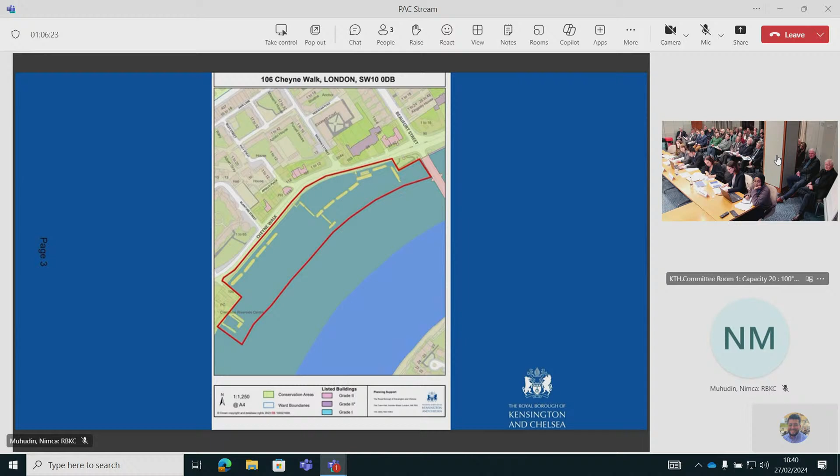So this is the site, known as Chelsea Reach or sometimes Battersea Reach. It's located on the northern bank of the River Thames, adjacent to the embankment. It's bounded by Battersea Bridge to the north and 106 Cheyne Walk to the southwest. It's historically been used for the mooring of houseboats for over 70 years. The houseboats are moored in 2 groupings separated by a central gap, and it's noted that they vary in size, design and condition.

That's a plan of the moorings. The site is located within the Thames Conservation Area. It's designated as a site of nature conservation importance within the River Thames and tidal tributaries. It's within the Thames Special Policy Area and the Chelsea Riverside Archaeological Priority Area.

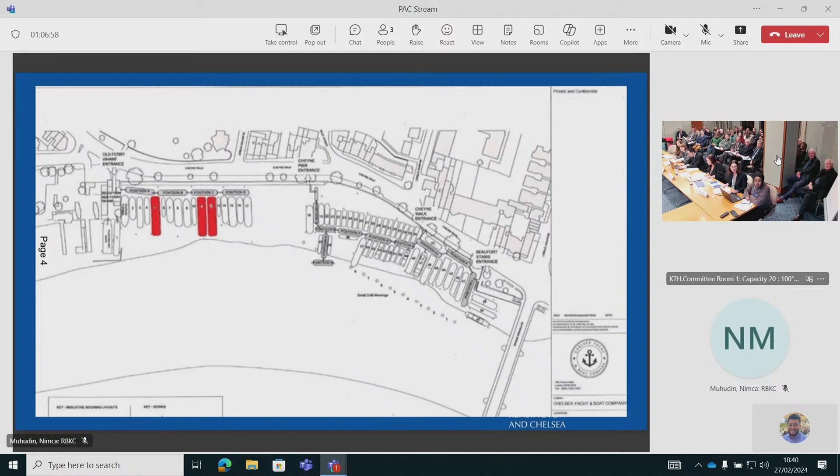So the legal and policy framework that you're making this decision in tonight is discretionary. Enforcement action may only be taken if there is a breach of planning control that's considered to be harmful. Enforcement action should only be taken proportionally to the degree of harm.

But you have the report before you, which considers the matters in detail. The main issues taken into account when considering whether it's in the public interest to take enforcement action are the effect of the material change of use by intensification on the Thames Conservation Area, considering its status, the river as a navigable route and its biodiversity, road traffic and on-street parking stress, the living conditions of nearby residents, control of waste and housing provision.

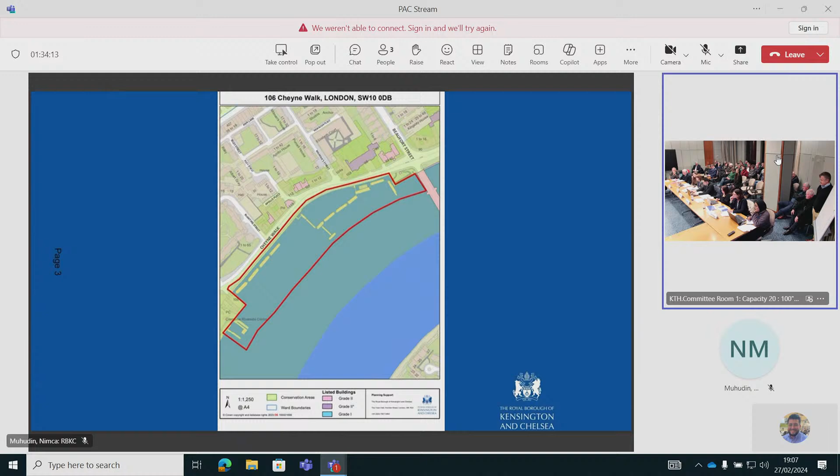Any other questions? Tim? For the objectives, yes. Could I ask if you know what the volume of the boats was that were moored there previously?

At paragraph 14, what I've calculated is, just give me a moment, yes, paragraph 14 actually. Houseboat Stow, for example, is an 86 foot boat, about 26 meters, and it has a width which gives rise to a square footage of 213 square meters, that's 2,300 square feet.

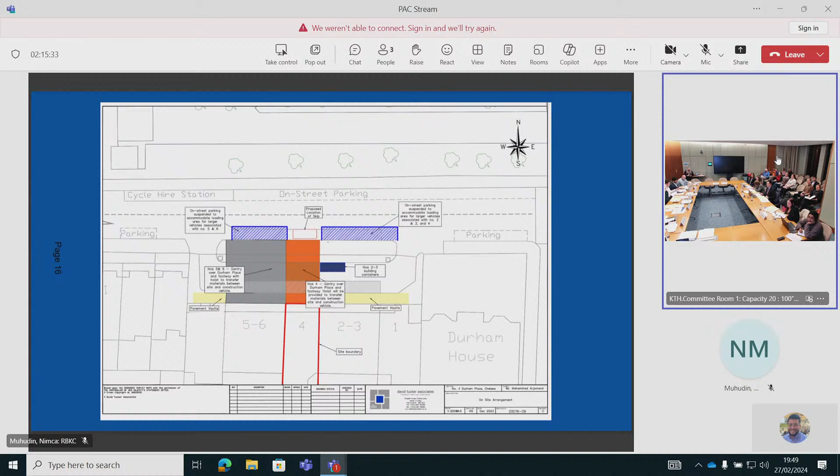What that meant is that number 4 proceeded to do its various works without having submitted details of its conditions, including the condition for the CTMP. Essentially it's been operating for about 2 years with a CTMP in place, but that CTMP has not been approved, and it's with you this evening. Now, the reason it's taken so long is there has been some changes made to that document, as well as consultation with neighbours, to ensure that obviously the document is fit for purpose. Now, the sites have been operated, so 2 and 3 is under construction, so is 4 and so is 5 and 6. So you can imagine that if not properly managed, it could be somewhat chaotic. But the plan before you just shows the current arrangements. Now, essentially they've each got their own separate plan, but they do work with each other, and you can see that they're sharing spaces with regards to parking suspensions to accommodate loading for larger loads. The recommendation is that the CTMP is sufficient, it meets the requirements of the condition, and the committee should be minded to grant that this evening.

That's it. Thank you. Are there any questions about this?

Just so the CTMP, the new proposal, has been. Yeah, so this CTMP by and large has been in operation for nearly 2 years. We made some amendments because as they're approaching the latter stages of the construction, they were considering keeping 3 skip placements on the highway. Obviously, as construction goes on, you don't need that amount of skips, it should reduce as you go through the programme. So one of the changes we've got was, you can see the red box just in front of the orange box is the proposed location for the skip. So we reduced from 3 to 1. So it's those sorts of changes that are just taking into account the way in which construction takes place over time.

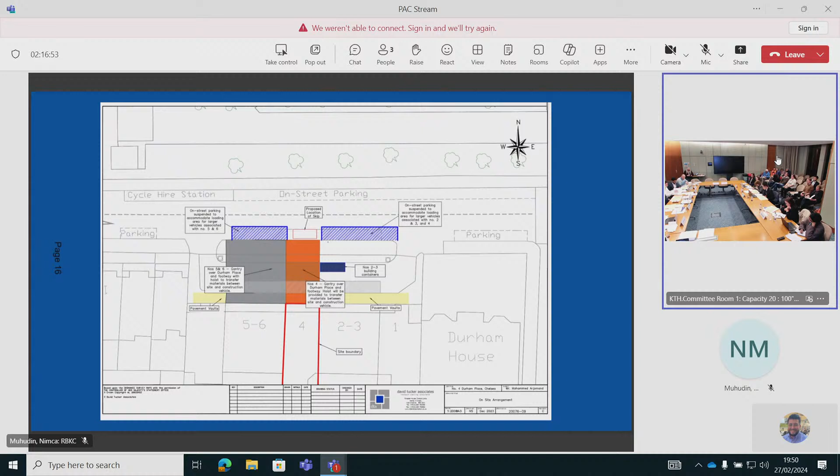In that case, I think we can make a decision. The recommendation is that we grant approval of discharge of condition. Can I see those in favour, please? So that is agreed, thank you.

If we can now move to the north, we have 2 applications relating to 1 Carmel Court. Now, although it's the same property, they actually relate to different developments. I think we're going to take them in the order in which they appear in the pack. Alice, you're going to introduce this. So we will first consider application 23/07598. Would you like to introduce that when you're ready?

Great, thank you Chairman. So the application before members this evening relates to number 1 Carmel Court, identified by the red arrow on the slide. As mentioned by Councillor Husband, there are 2 applications before members this evening. The first relates to some alterations at roof level and to the rear. This is the first application which I'm going to present and which is going to be considered.

So the existing front and the proposed front elevation can be seen on this slide. The red arrow denotes the application, and the red marking on the left-hand image includes the demolition of those front railings and the existing access hatch to the roof.

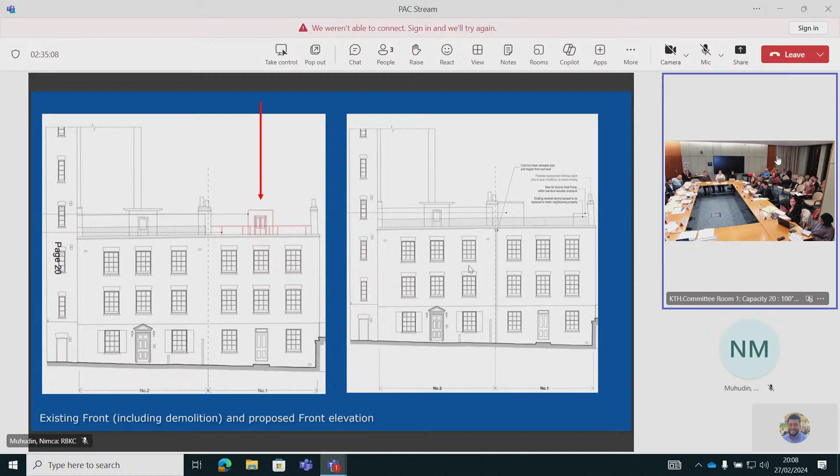I think it would be helpful, considering it's a conservation area, if the railings could match existing. It is - sorry, I'm saying it's matching existing. Okay, perfect - zoom in on that was what I wanted.

Yeah, okay, thank you. By the way, just for clarification, I think this point raised about being a roof terrace - we're not asking for a roof terrace. It needs a sensitive enclosure to be able to access it and everything else, but there isn't an actual - we're not saying you could use the roof as a terrace. Be absolutely clear, thank you.

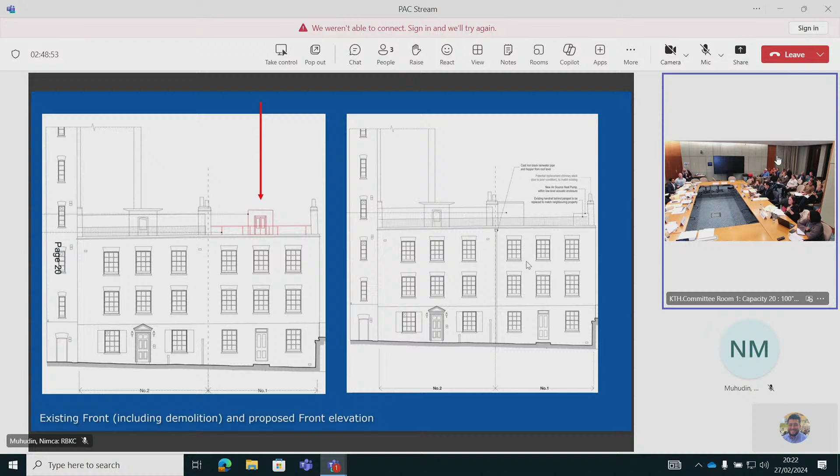Is there a railing all the way around? Not currently - so the application seeks to extend that railing to the rear. Would that encourage use as a roof terrace?

You wouldn't necessarily now go and sit with your legs dangling off and have a pint, whereas if you put up a railing, you could have a little stool and go and sit there. So I guess, given that the applicant has said they're not intending to, hopefully they won't, it shouldn't be a harm to them. I would feel more comfortable with that condition.

Just be my point. So if members wish to include a condition, if we can. All right, I think we need to make a decision.

You could either add a new condition to preclude the use of the roof as a terrace, and should that condition, number 7, no longer be needed, then you could remove it. I think having a new condition precluding use of the roof as a terrace, if we can do that, I get the distinct impression that would be supported by colleagues. If I may, just to avoid confusion, I would suggest that we amend condition 6 to remove reference to terrace or roof railings.

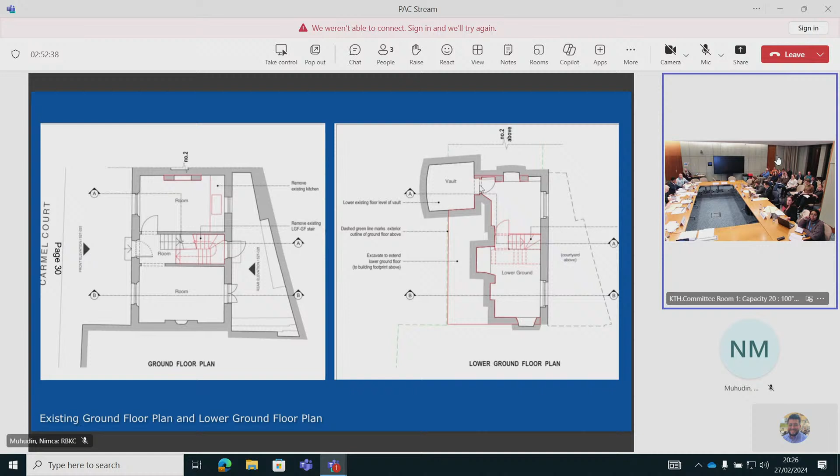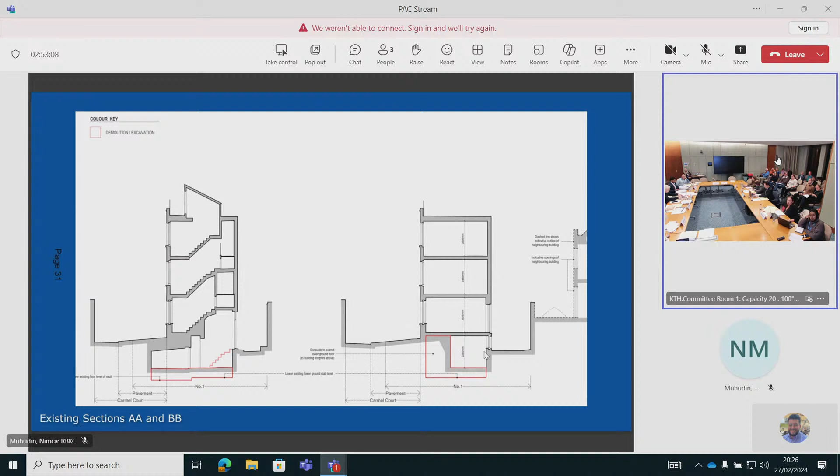The existing sections can be seen on this slide. As referenced in the officer report, there are different levels across the site which can be seen on this section. I would draw members' attention to the rear of the site, in the rear courtyard or garden area, where officers have considered the prevailing ground level of the site to be. Members can note the existing lower ground floor in this location on this section.

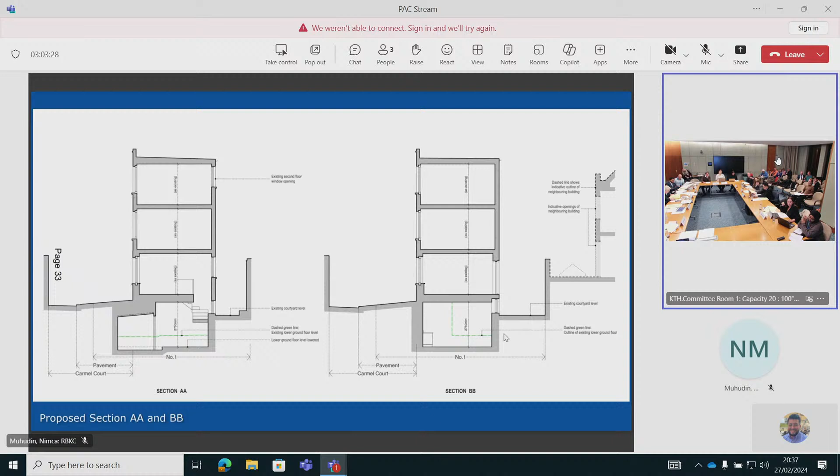You're not touching the existing one, you're just extending towards it? Yes, the green line indicating the drawing probably shows it best—this is a great plan, it indicates where we are. You've got a little WC in that box area, and then, as I say, my arm's width—literally this size—basically creates a kitchen unit from here to here with a bit of space for someone to walk, and you can put a kitchen table here. So it's very modest in terms of scale of creating space.

I'm afraid you're not allowed to cross question. No, fine. It's... okay, all right.

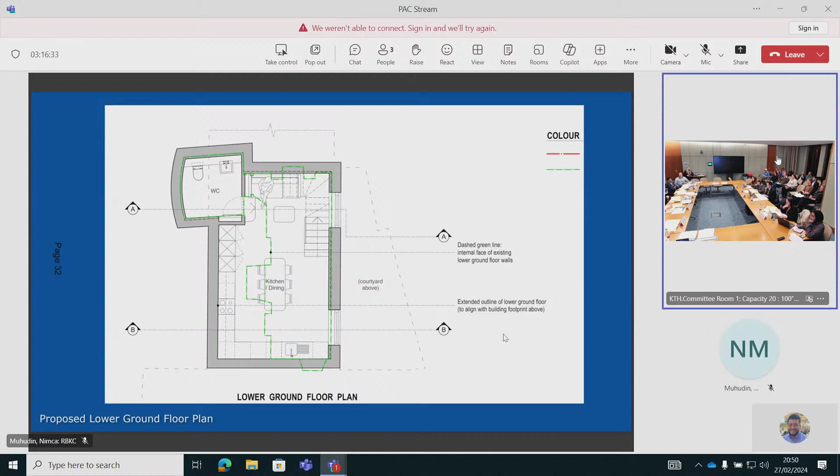Not to throw another opinion out there, but my view is that the opening we talk about going on the back should be like a little window - there's not a door on it. So I don't know how you can consider this the ground floor. I think it's a lower ground floor - quite clearly, in relation to the rear of the property. But I guess the argument is that it's at ground level, so that's where I would disagree. But given the scale of it, I think it's so small.

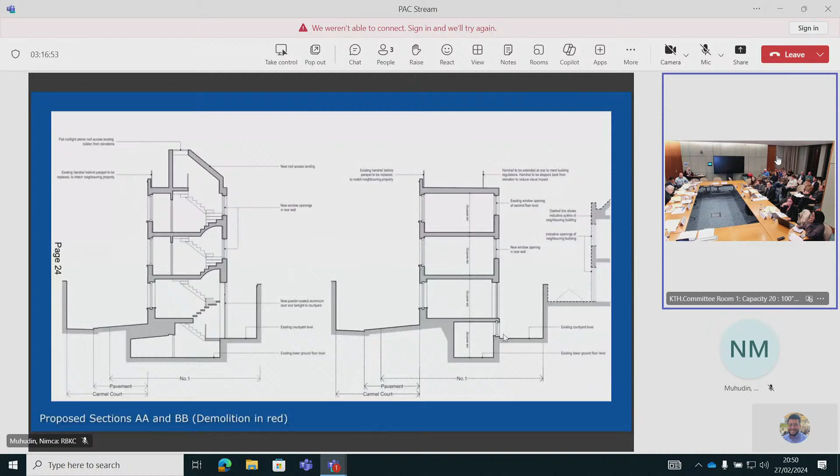If we can get it, and the applicant's indicated he's happy with some of the additional regulations. All right, I think after considerable discussion, I can see where there might be a majority. So I think we seem to feel we're content that the officer's interpretation is correct - CL7 doesn't apply in this case. I think probably on balance, we're inclined to add conditions.

I would suggest a construction method statement is the principal thing which would give a degree of reassurance. And noise, dust, vibration as a result of construction - would that be covered within the code of construction condition? The code of construction doesn't specifically mention a condition about noise, dust and vibration.

With that, members could look to include a condition for a dust management or small scale dust management plan - I think we often use that on proposals. So that would be a second additional condition. So on that basis, the recommendation is to grant planning permission, but adding in these two conditions which we have just been discussing.

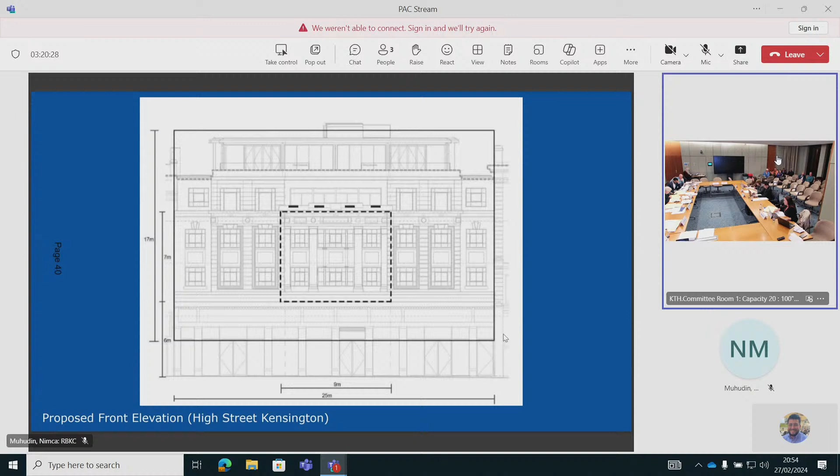So this is the proposed front elevation, so members can see the one-to-one image of the proposed building, which is being constructed in accordance with the application granted in, I think it was 2016, as referenced in section 4 of my report. And this is a proposed visualisation of that shroud with the advert centrally located. As referenced as part of my officer report, there is some history on the application site with two advertisement consents being refused and upheld at appeal.

There are some matters to pick up in the addendum report, which I didn't mention at the beginning of my presentation, so I draw members' attention to that as well. That concludes my presentation. The officer's recommendation is to grant advertisement consent subject to the conditions set out in section 9 of my report. Thank you.

Thank you, any questions about this? This is the old - it's where Robert Dyas used to be a few years ago, actually. Yeah, okay, well in that case, I think we can probably move straight to a vote.

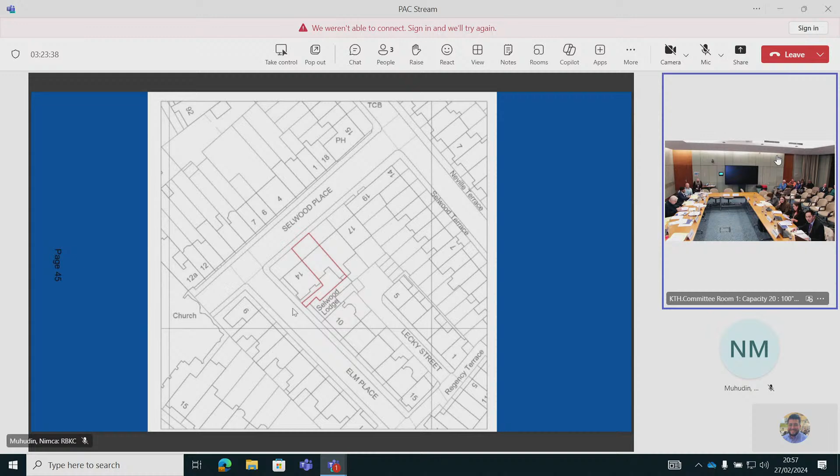This is an extract from the final CTMP submitted.

The route of construction traffic would enter from the main road with the blue arrow from Elm Place, which they will deliver the vehicles to stop by the rear entrance at Elm Place before leaving the site through the red arrows. So turning right from Elm Place to Selwood Place, and then turning right again to Selwood Terrace before exiting to the main road.

This is an extract of the swept path analysis within the CTMP, as available in the members' pack. And this is an extract of further details with regards to the swept path analysis and a diagram of the gantry setup.

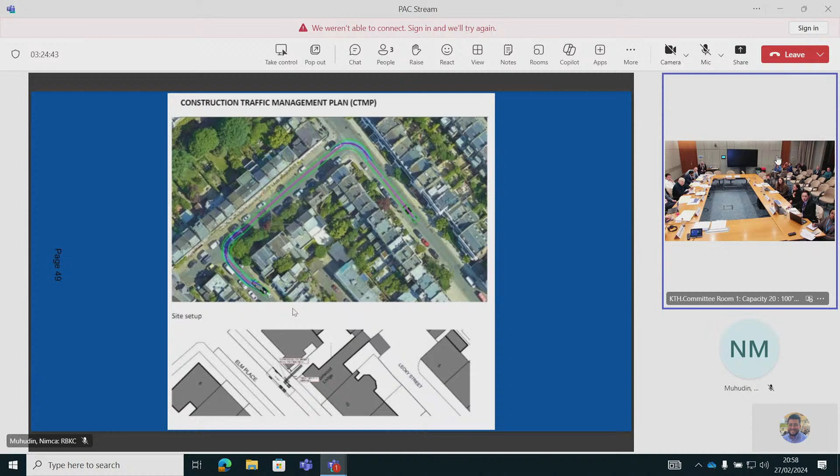This is a slide which shows the close-up of the gantry as proposed to be set up.

This is the extract of the proposed suspended single parking bay, which gives access to the rear of the site with the white door shown with the cursor here. Yes, apologies for the lag by the laptop.

Officers are minded to recommend approval of the CTMP as set out in the officers' report in section 8 of these officers' report, and you are also advised there's an additional representation as stated in the addendum.

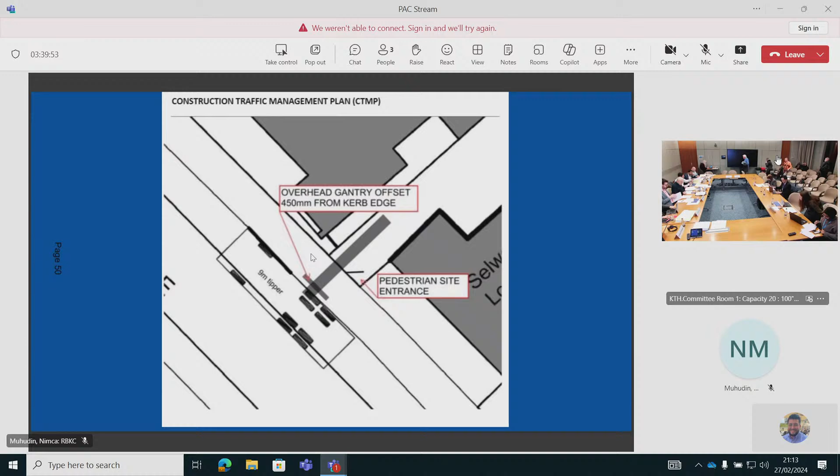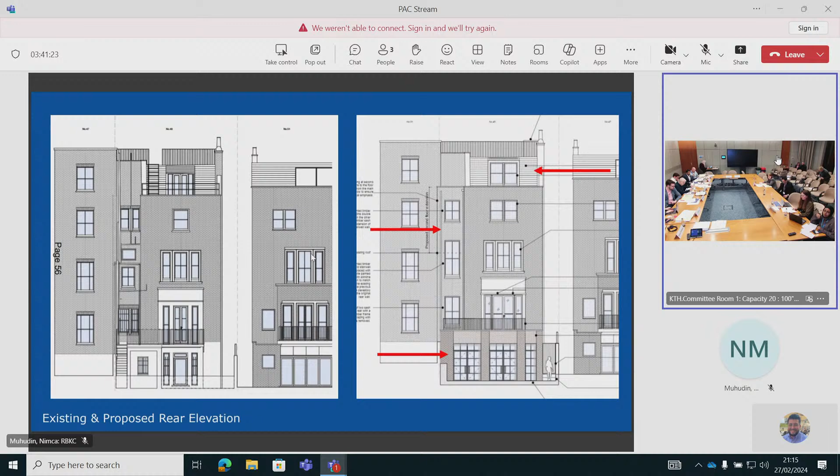The existing and proposed rear elevations can be seen on this slide. The red arrows draw attention to the main elements of the visible form to the rear, and these include the lower ground floor rear extension, the roof dormer alterations, and the extension at second floor level.

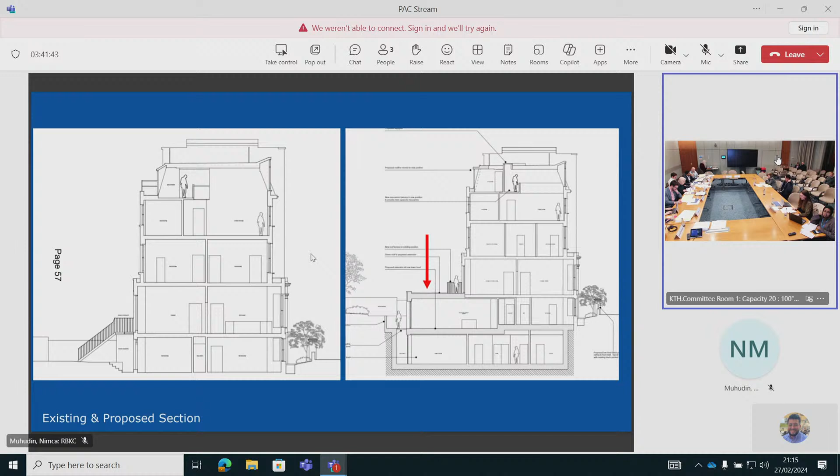The existing and proposed sections can be seen here. The proposed basement is single story and will be sited underneath the footprint of the building, projecting to the rear. The lower ground floor extension is indicated by the red arrow. Recommended condition 9 restricts part of the extension from being used as a terrace. To conclude, it is recommended that planning permission is granted, subject to the recommended conditions set out in the officer's report.

There are no speakers registered for this case, so we move straight to questions. I haven't registered to speak, but please, can I make an off the record comment? No, I'm sorry, you can't speak at this stage. So, questions to officers.

I'll start. There's quite a lot proposed here, quite a lot going on in this building, but it seems, if I've understood correctly, that really the principal alterations relate to the rear of the property, and also to the roof, which is being changed relatively fundamentally. Is that right? Have I understood the drawings correctly? Yeah, I believe so, yes.

Okay, please, any other? Okay, well in that case, sorry, yes, I was getting my thoughts on that. Yeah, I seem to remember that one of the concerns of the local residents was that during works there were concerns about privacy, because they had to do a temporary construction, if I remember correctly. I think residents were concerned about privacy in their existing homes on the back of that temporary construction.

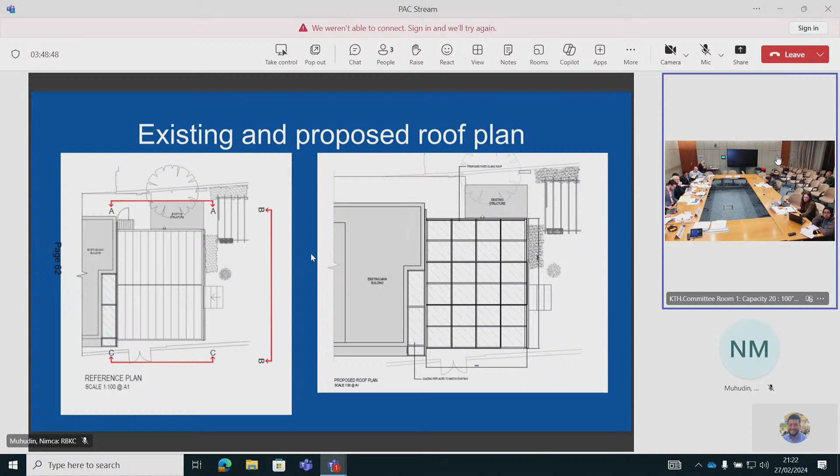The application seeks permission to slightly change the roof so it's more glazed, and to also improve the sidewalls of the current pavilion. The masonry wall at the bottom remains the same, and the parts above are altered.

The officer's recommendation is to grant permission in accordance with the conditions in the pack, with specific conditions relating to noise and music, which have been included to reflect the applicant's submitted noise report. That concludes my presentation. Questions?

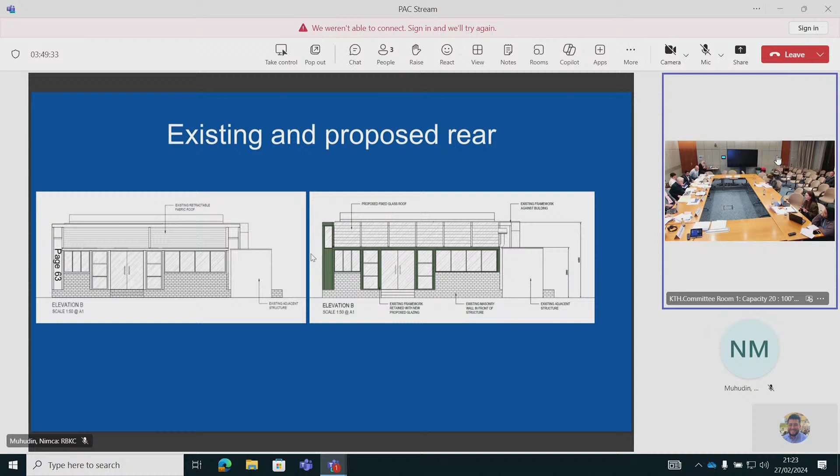Now we have two decisions to make. First, the planning permission - the recommendation is to grant as set out in the report. Can I see those in favour of granting this? That is agreed. For the listed building consent, is there anything further you wish to add? No, that would also come within the officer's report, the same as the main planning application. In that case, the recommendation is to grant listed building consent. Can I see those in favour of granting? That's granted. Thank you very much indeed.

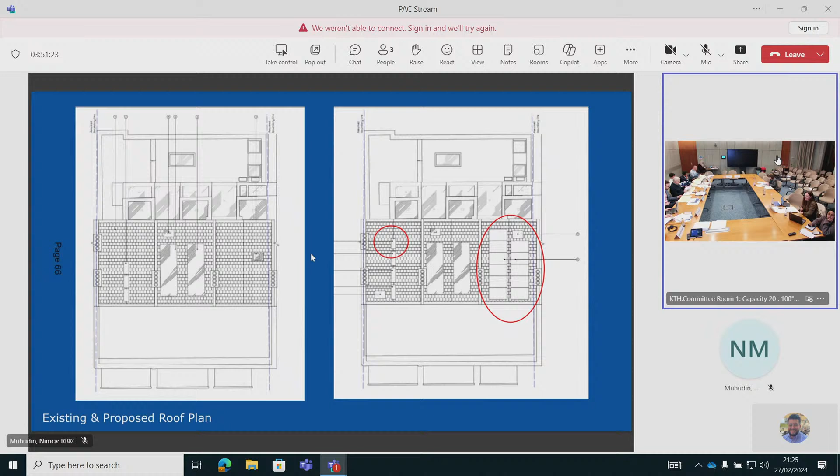Any questions relating to this? I think it's obviously quite a substantial roof area here where this development is going to take place, so there is space to install these things without them being extraordinarily conspicuous. Any questions? No. In that case, the recommendation is to grant permission with conditions attached. Can I see those in favour of granting, please? That is agreed.

If we can - I think, stay in the - some reason it's - well, that's actually in the south back. So if we now turn to the application at Kensington Mansions on the Warwick Road.

Jessica, back to you. Thank you, Chairman. Application for members for the replacement of windows at Kensington Mansions. This application is for members because it's an RBKC own application, so it comes to committee for a decision.

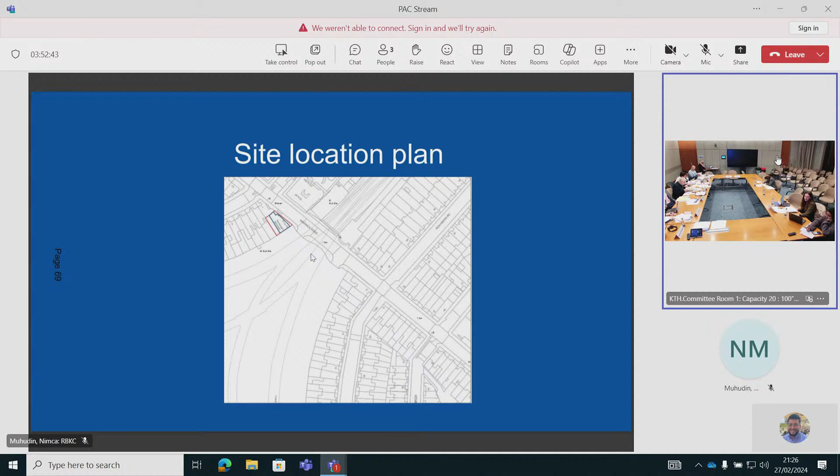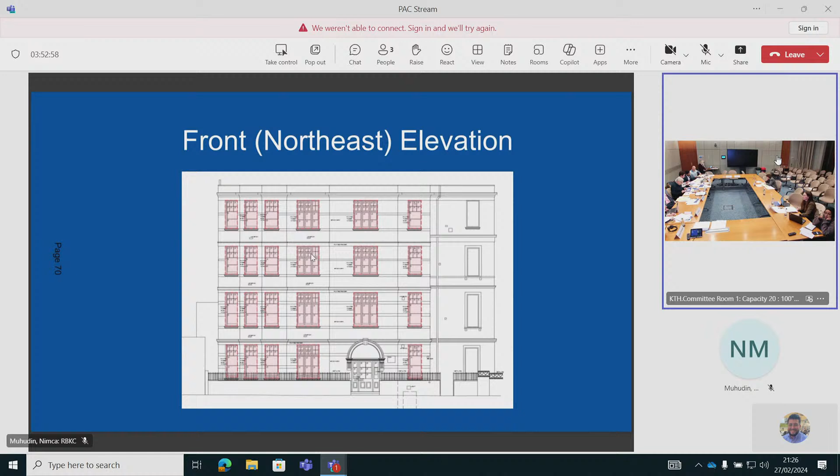On the screen is the application site. To the top left you can see the development site, and then there are existing and proposed windows, with the red boxes denoting the areas of windows to be replaced. This is on the northeast elevation, and this is on the southeast elevation. That concludes my presentation, back to answer any questions.

So the recommendation here is to grant with conditions attached. Can I see those in favour, please? So that is agreed.

And finally this evening, still in the south back, the last application, this is the application on highway adjacent to 1 Montpellier Street. Again, this application comes to committee because it is an RBKC own application and therefore requires a decision from committee members. The application site relates to an existing flower kiosk unit.